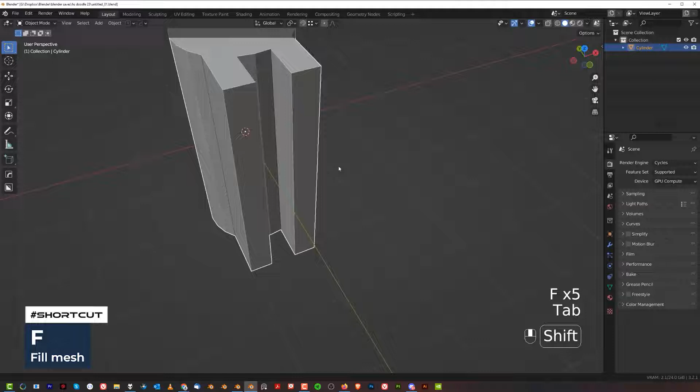And remove faces. Then I'm going to simply select these two and press F to build back the faces. So select these 2 faces, go to top view, and I'm going to press G and move it in here.

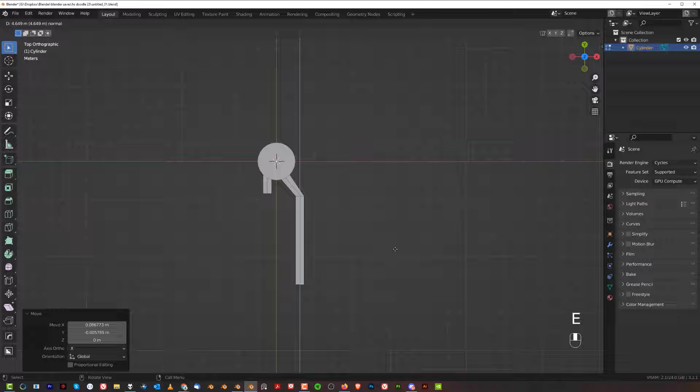Press G and move it somewhere here. And then we're going to E to extrude that like that, and move it somewhere here, and then press Ctrl plus on the numpad and kind of move it somewhere here.

I'm going to grab this ring here, so click, alt click. That didn't work, let me just select everything with Control. There we go. Go to orthographic top view, and I'm going to scale it Shift Z to make sure it's going to scale only on the X and Y axis, and do something like that.

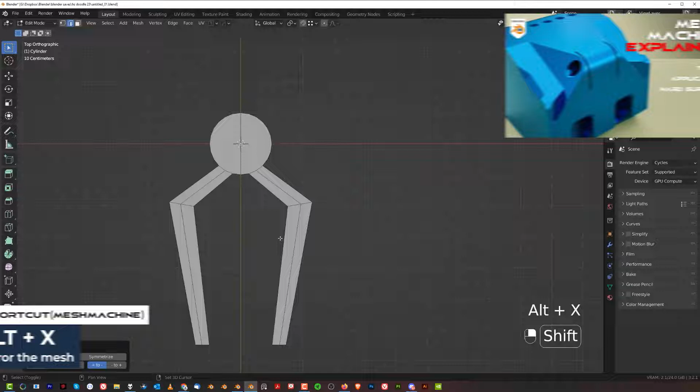Alt X with Mesh Machine, which is a paid add-on, but you can also symmetrize it with Blender. So you could go here in edit mode to mesh and symmetrize, or you could go to Alt X with hard ops and press D, symmetry, and symmetrize it this way, okay?

Now I'm thinking that this maybe is a little bit too close to the middle here. So you know what we're gonna do? We're going to select these faces here and remove them. So remove faces, and I'm going to remove this one as well, and I'm going to actually connect them here, shifting it by 1 face, okay?

Then select them both here and just simply press F to rebuild that shape, and then we're going to rebuild it here, F, and 1 more face here, and 1 more time mirror to the other side. So we got a bit more room here to move in the middle, okay?

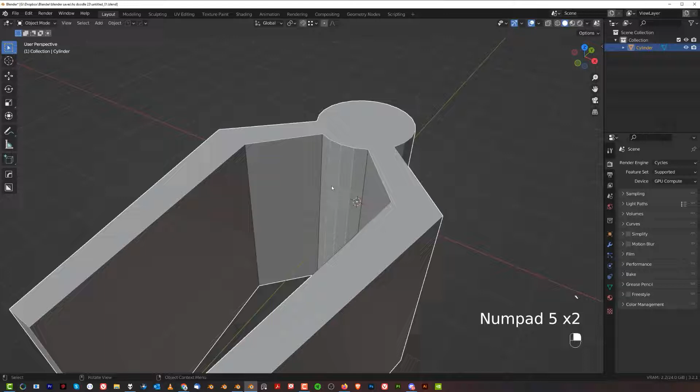So now what we're going to do is create a bit of a bevel here. We're going to remove this one, dissolve, select that, Control B, and make sure you maintain more or less the size of these faces. Alt X to the other side, same thing here, and chamfer with Control B, and there you go.

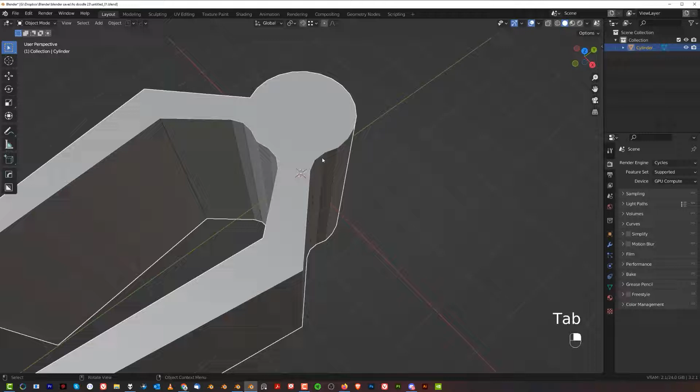Now we don't need that junk in here, so you could either remove it with hard ops, or we could simply select these 2 verts and dissolve vertices. Then you're gonna be left with this, J, and combine here, J, okay? Cool, and actually we could combine this one as well, J, alright?

And then Alt X and Alt X, just symmetrize or mirror both ways, and you're good to go. Now here we got a bit of a problem, so we're going to align this one with this. Select these, shift select that, go to top view orthographic, Alt A, and move to the top. That's also with machine tools, and you're going to flatten this bit in here. This should do.

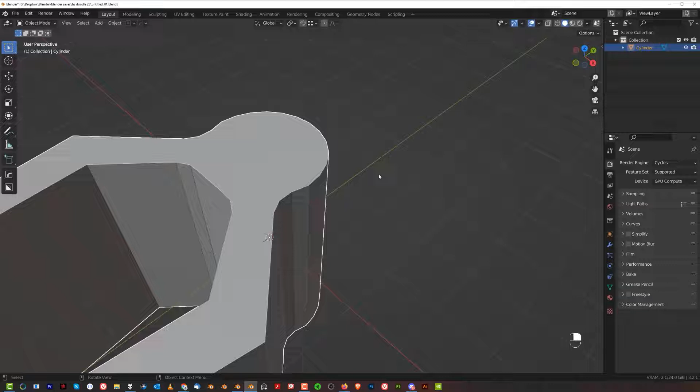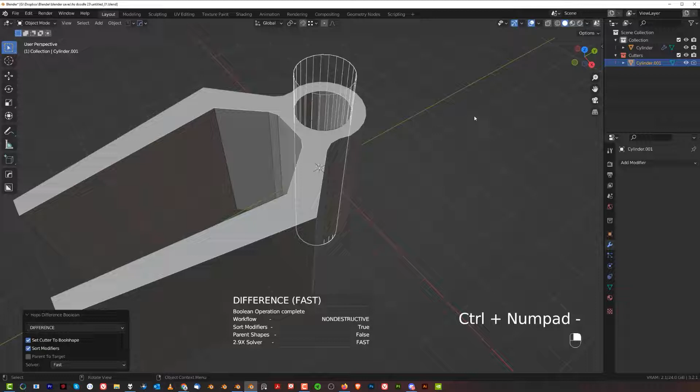Now let's add another cylinder, scale this with SZ, and boolean that with Hard Ops because it's easier. If you don't have Hard Ops, you can just use a vanilla boolean through the modifiers, or enable bool tools through preferences. Click that, select that, and hold Control and press minus on the numpad, which is the same effect.

Now here, what we're going to do is cut this here. You could use a cube, but I'm going to be using Box Cutter because it's faster, and there are links to all the add-ons I'm using in the video description. I'm going to cut it somewhere here like that. Press B, and we're going to add maybe 4 segments, I don't need more than that. We're not going to cut the cutter.

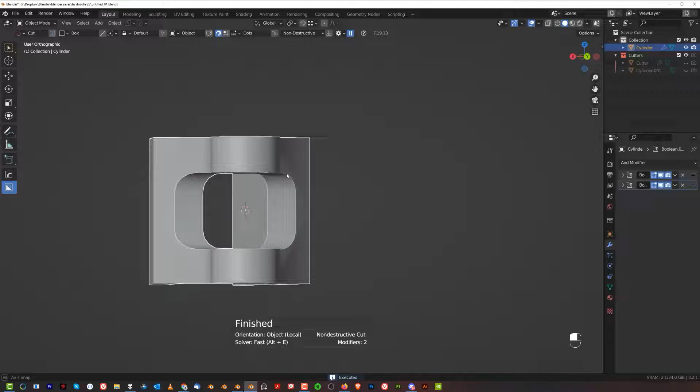We're going to cut actually this shape here, so again 4 segments and cut, and it's going to cut it through, which is pretty cool. Let's move it a bit deeper, so GY and move it a bit deeper somewhere here, and SX to scale it on the X-axis.

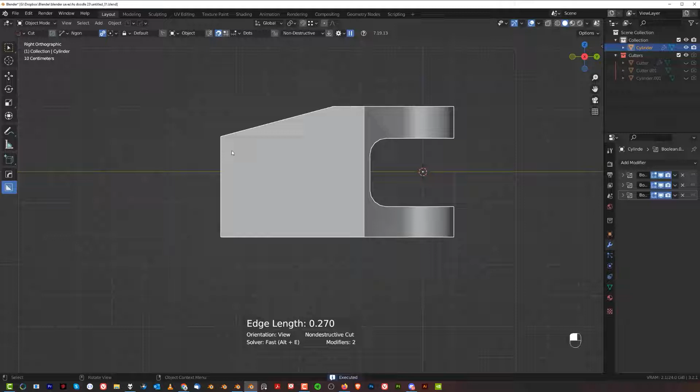There we go, and we're going to cut another one here in this area. I'm going to use Hard Ops to create a cut here, maybe here like this. And then I'm going to create a cut in the middle here with an Ngon, maybe like this, then press B, create 4 segments in each corner, and cut through.

Now this one in the bottom here could be beveled as well, maybe 4 segments, and I'm going to mirror to the other side. So this would be our basic shape.

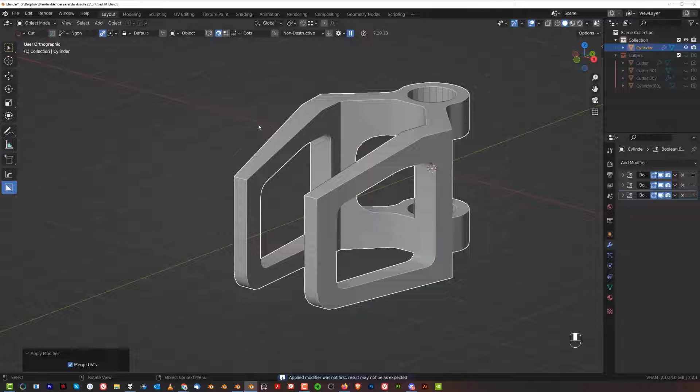In fact, this one here could also be mirrored, so we could go to modifiers with Control Tilde. Let's see which boolean was it - this one, right? So let's apply this. And I'm going to grab that and Control B, also 4 segments, Alt X to the other side, and boom - this is our basic shape.

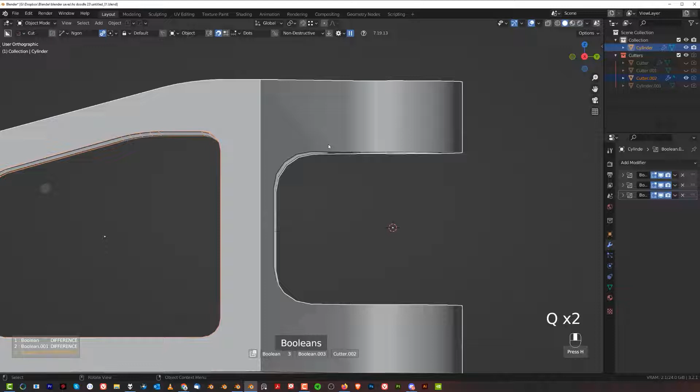We could also bevel this one here just to make it kind of smoother, and the rest is gonna be angular. This is a little bit deep, we can move it a little bit to the right - use ever scroll with Hard Ops and move it somewhere here. You gotta be careful, this is gonna be really tricky, this kind of bevel transition here, but we can work with that. So this would be our basic shape.

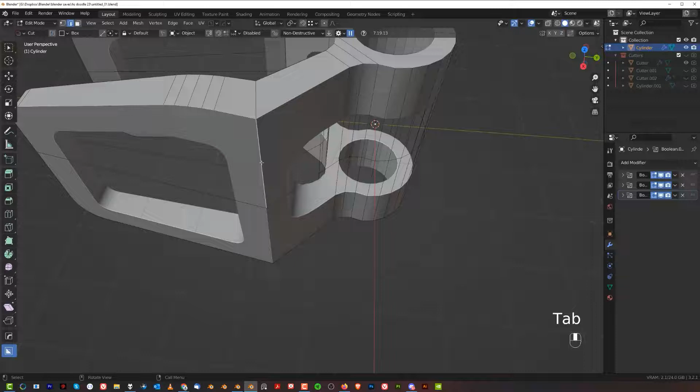Okay, cool, now let's think - we could also slightly curve these, like that, right? So we could curve these. Let's select this one as well, it's going to be less work for us, and do something like this, and then Alt X, and it's going to be a little bit more curvy.

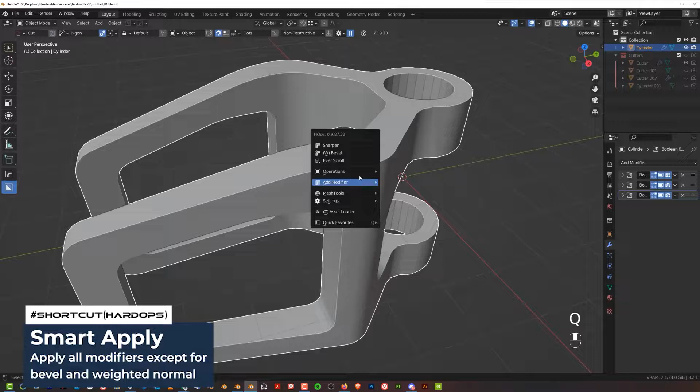Now technically you don't really need sub-D for this, but we're going to convert it into sub-D, I'll show you how easy that is. So let's just go here and apply all the modifiers, right, let's smart apply. And now we can start cleaning that thing up. So we need to create connections everywhere and make sure that we have quads. So we can start here by pressing J, and another one.

We could - where is it here - another one here, so J. Then we could remove these 2 faces, so remove faces and simply reconnect them with F. That's going to save us a little bit of work. And here we could create, let's say, 2 loops and combine them here and here.

Now situations like this, you can go with triangles because it's a flat face. So you could, for example, do something like this - this is perfectly fine, don't worry about it, there's not a quad here waiting to happen. Alt X and you're done, and then Alt X down. Oh, in fact, can we actually do that? No, we can't, so we need to do it manually everywhere. Okay, cool, so here, the same thing.

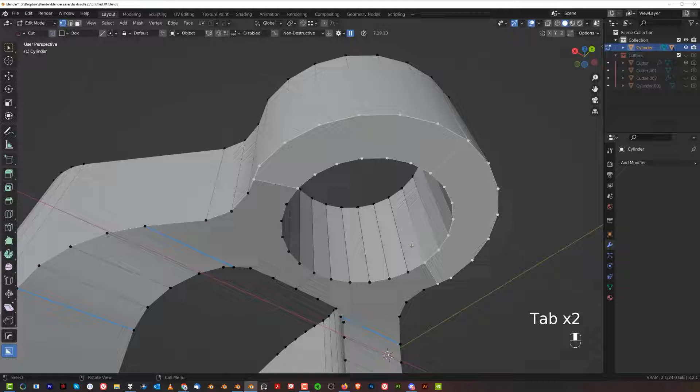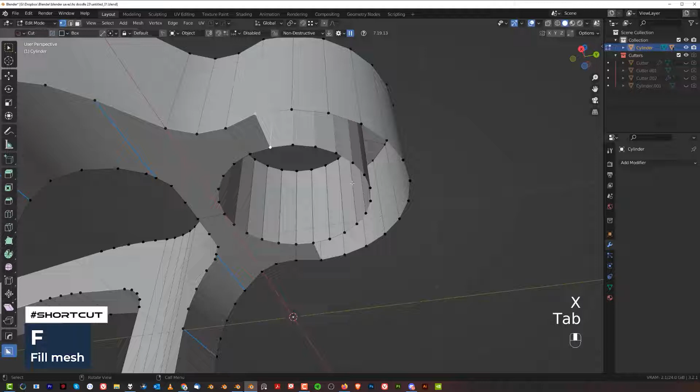We just have to make sure that we have all the connections. So J and J, and we're going to remove these two faces and connect it here. That didn't work very well for us, let me see that. All right, the connection here has to be like this, and move this one here. There we go, now we can remove this face and connect them properly together. Here, same story, we could connect them with J.

You could also be using the HardOps edit tool, which is fantastic for connecting edges. I'll show you in a minute how to use it. Here, connect these two, and you got quads everywhere basically. I'll do the same to the other side.

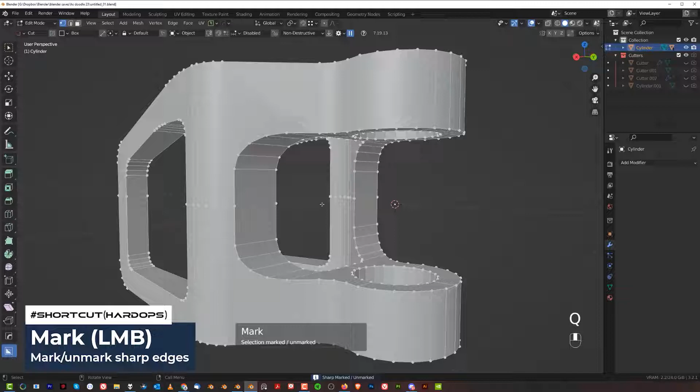I want to remove the hard edges, so what I'm gonna do is select everything and click on mark, which will unmark everything. I don't need any hard edges here. This is not the best connection here, but it's gonna work, don't worry about it. So that's done, and here we need to do the same thing.

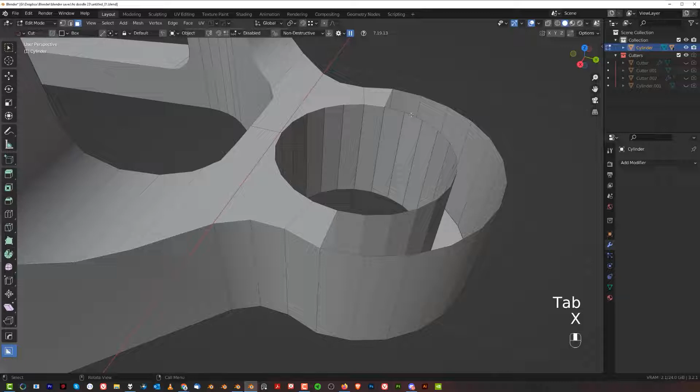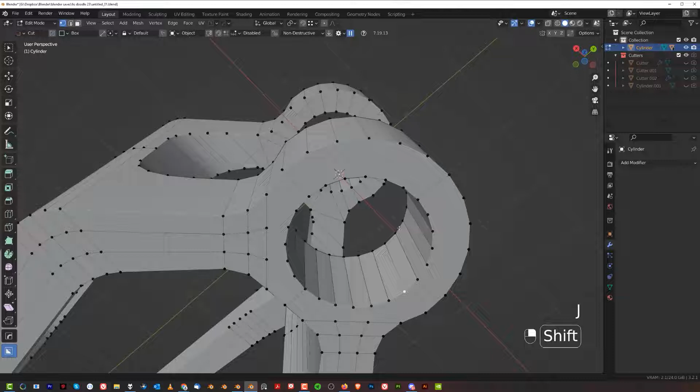So, J, and here J, and select these two and faces, and basically redo that, and connect these two, and connect these two, connect these two, and the same thing here. So connect that and Alt X, and same at the bottom. So connect maybe these two here, and these two, and then remove these faces, rebuild that.

Let me show you this edit tool in HardOps. It's here: Edit multi-tool, press J, and then you can click and drag to connect - click, click and drag, click, click and drag, click. Let me see that. Press space to confirm. This is not the best connection here.

Just remove that, I think it's better to run it this way. And move this one here. So GG, right? Let's just run it here and this way here. Triangle here in the middle is fine, it's a flat face, it doesn't matter, okay?

Cool, here we will need some connecting loops. So let's run maybe one here and split it into, I would say two, maybe it's enough. And connect them here, 1, 2. And then we could drop them down a little bit, although it doesn't matter.

If you don't have to worry about topology on flat faces, don't waste your time on it. There's no point of creating beautiful uniform quads if you're not going to be using them. The most important thing is for that to hold shading. But if you had, for example, curved surfaces, then even quads are kind of important - the even size of quads, because the shading is gonna be a bit more uniform. Here, two of these edges, connect them here, and simply mirror to the other side, and that's the front kind of done.

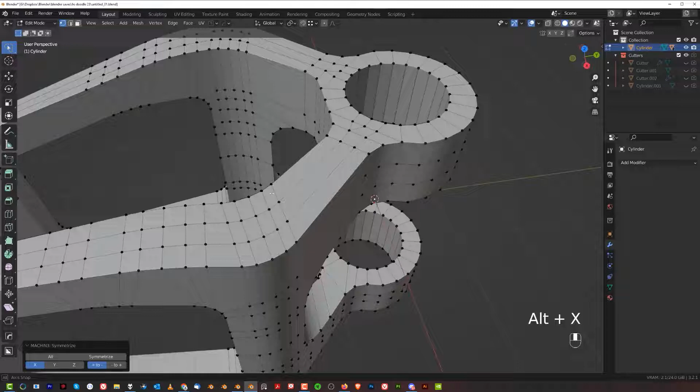And there's going to be another angle here, so we can run a loop here to mitigate that, and run an edge here and just Alt X to the other side. These two, they could be merged together like this. This one should technically go up, but I think it's gonna work, so we can try that. Cool, so I think we connected here. But we still have this problem here on this side, so let's just finish connecting edges.

So J, and then J, and J, J, and J, and the same here. So J, J, J, and J, right? Cool. Same in the bottom.

See how sub-D is slow? That's what I'm talking about. If you don't need to use sub-D, just skip it, because it's just retarded. I mean, use it when you really need it, okay? People just keep saying that you need topology and all that. They're full of shit, you know? You need topology when you really need it. When you don't need it, don't fucking use it, because you gotta be retarded to use it. Lose your time on bullshit that's unnecessary.

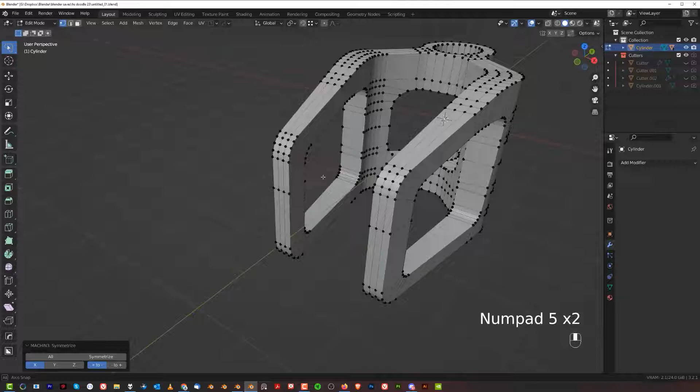So now, possibly I could run a loop here. There we go. So this loop, where is it going? He's going here. That's not what I want. Let me just turn it off here and run it through the bottom here, like this, alright?

There's a triangle here in the bottom, and we need to fix that. So let's run a cut here, and combine this here. Dissolve that, and move it slightly here. And see on this side, yeah, we're gonna get this. So what we're gonna do here is we're going to run a cut like that and remove this.

And there's gonna be an n-gon here. So we could technically run a loop and do this, and you would have a triangle here, but what you could do is combine it like that, and maybe run a loop here through this shape.

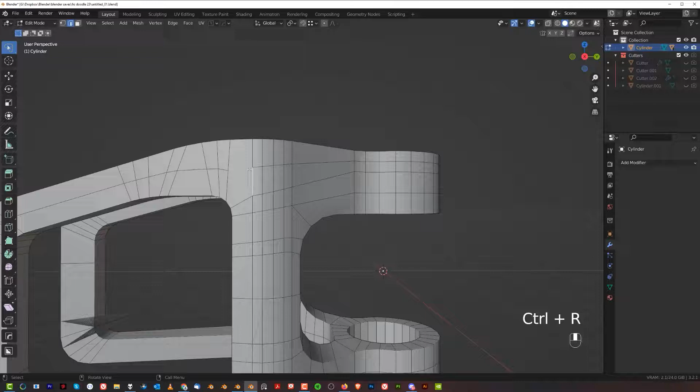So here, and then combine these in the middle. Delete that, and here through the top as well, and then combine these two. Okay, and problem solved, right? Alt X. And now here, this needs to be sorted because we got this problem here in the top.

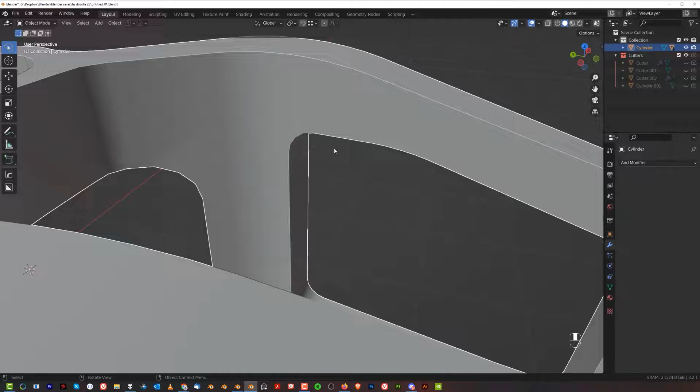This massive angle needs to be solved. So let's just add this another angle here. So let's just fix that by slicing them into smaller portions like that. And then what I can do is I can split that edge into two, or even three. And what I can do is end this shape here in a triangle, because it's a flat face, so I don't have to worry about shading. See what I mean? Then Alt X to the other side.

Now what I'm going to do is select everything. I'm going to resharpen it, which means I'm going to have sharp edges everywhere. Click on one sharp edge, press Y with Mesh Machine select and S select. This will select all the sharp edges that are connected. Then we need to select these that are not connected. So here, right, these, right.

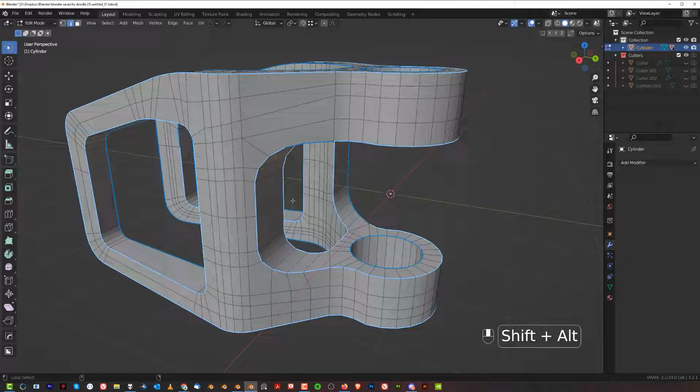And what we're going to do is run bevels on it, just to create security loops around these shapes. Okay, so here, here, and here. Cool. And this one too, right? This one in the middle.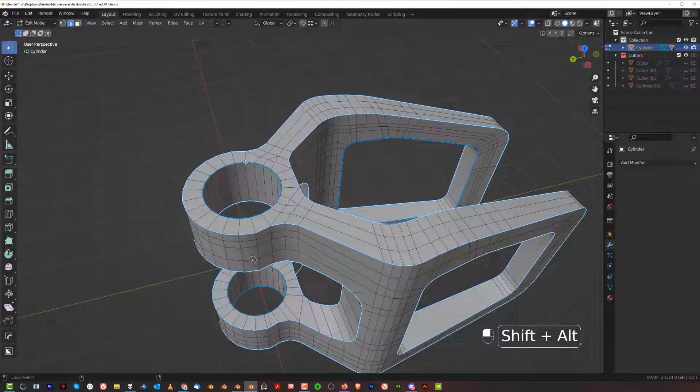So this one needs to be selected too. Cool. So now what we're gonna do is we're gonna press Control on this one as well, right? And this one. And everything. Cool. So now Control B, right?

And you want to press P to adjust the profile. And once you flex it to 90 degrees, press A to adjust the size of it, okay? And then click, and you can turn off the loop slide, which will prevent some of the disasters happening here when the loops are being pulled, okay?

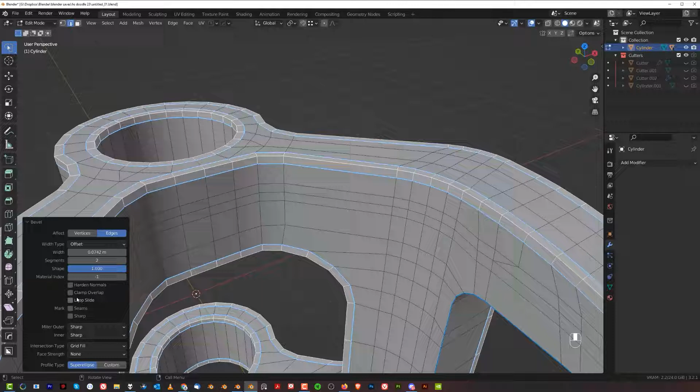And this is your security loop around the bevel. Here too, Control B, let's just do that. And let's remove all the sharp edges because we don't need them. So select all, Q, unmark, and then Control 3, and let's see what we're getting. This is a sub-D already running around.

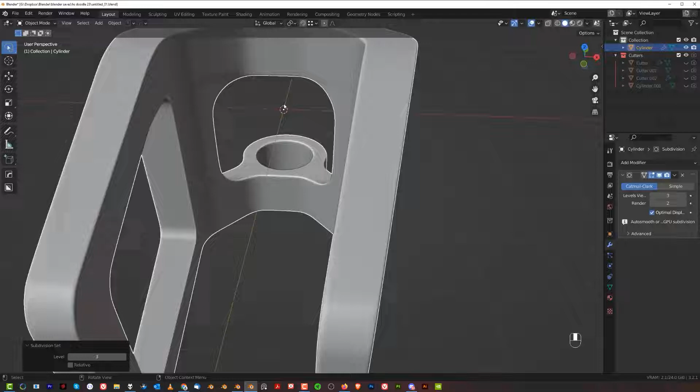There's some shading problem here. Let's check it. So let's go to subdivision, turn it off in edit mode. The reason why I get shading problem here is this area. We need to relieve the pressure here a little bit. So let's run something like this. And this should actually help.

The same here, we could have another loop running around just to make these shapes a bit smaller. Combine them here and combine them here. And this should help tremendously. There you go. Still some kind of dent in here.

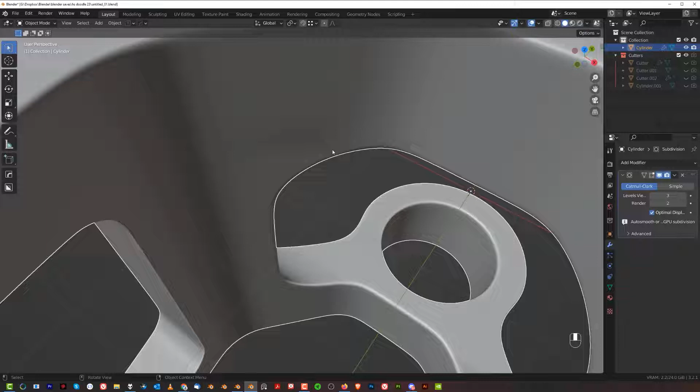Let's just Alt X to the other side to mirror this. There's still some kind of this pole here causing the problem. Seriously, the flow technically should be going with the curvature, which means it should be going vertically, not horizontally. This goes horizontally, right? So we could redirect curvature here like this, create a triangle, remove that, create another loop here, and combine these two.

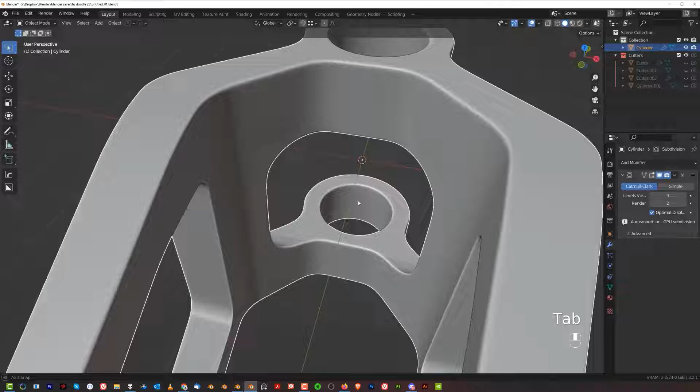And maybe create another loop here. Whoa, okay then. Create another loop. Let me see, this triangle would actually work now. Works fine. There's still kind of a dent here, and that's caused by this pole here in the middle, okay? So here we could...

Let me think, this triangle should be moved to this area, okay? So, GG and move it up, GG and move it up, and there's a massive pole right now. So what we can do is run another edge here like this, okay? We can relieve this pressure here from this area, and this should be much better, okay? So GG and drop it down, GZ and... oh, this is not combined, there we go.

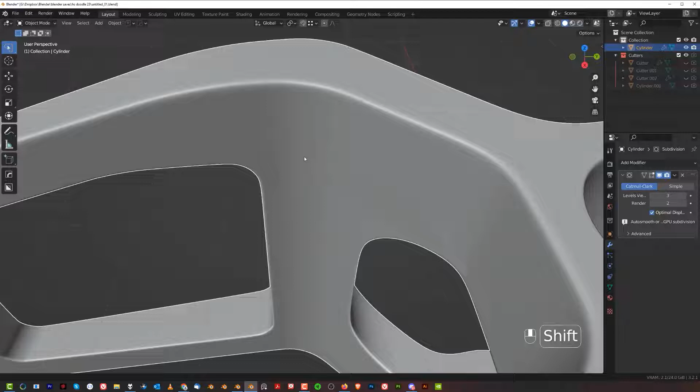GZ and drop it down, and then you don't want triangles on curved areas, on curvatures, but this is going to be flat, so it's okay. So this kind of works, this kind of works now, okay? So you see, triangles are fine as long as you run them on areas that do not bend or have any flex on them. Flat areas can handle n-gons, triangles, anything you desire.

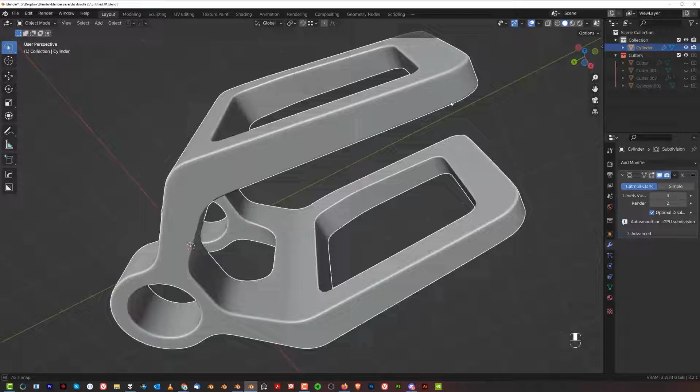And there you go, guys. It's a very simple sub-D shape. It looks really clean, no problems. Topology is good. It's not super equal, but it doesn't really matter. You can see clearly that it doesn't matter. As long as you can get away with shading, this is all you need to worry about, okay?

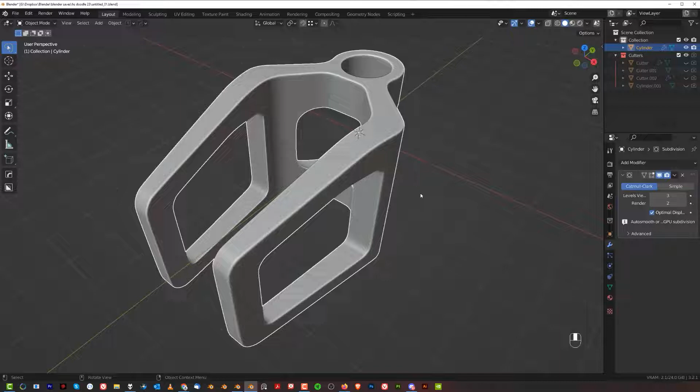So if you're not going to be bending this, and you're not going to be bending this because that's a stiff piece, it's a solid piece made of metal. So no one's going to be bending that, which means it will not be animated. So these quads will not work for animation, they're going to be static. So it's a static mesh, which means if you need sub-D, you just need to make sure the shading holds and the quality of the sub-D itself.

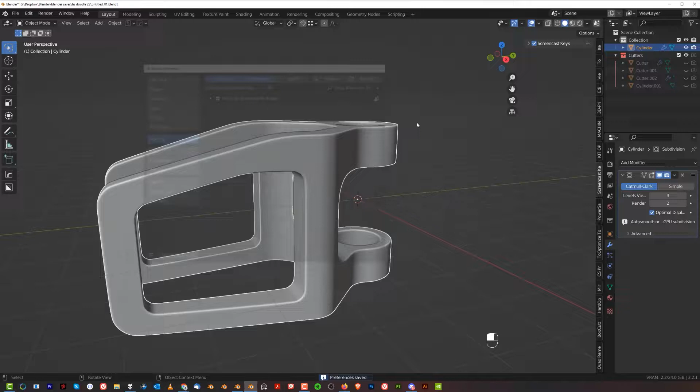The quads here do not have to be equal. Now, if you really want to make something perfect, you can go the easy route and go to Quad Remesher. I don't even know if mine's installed at the moment. It isn't, but I can install it very quickly and I'll show you. Now, Quad Remesher, it's not cheap, it's about $100 or $110. But if you're working with sub-D, especially with sculptures, it's superb, and it will save you a shit ton of time if you need to retopologize something very quickly, because Blender's native retopology tools are garbage.

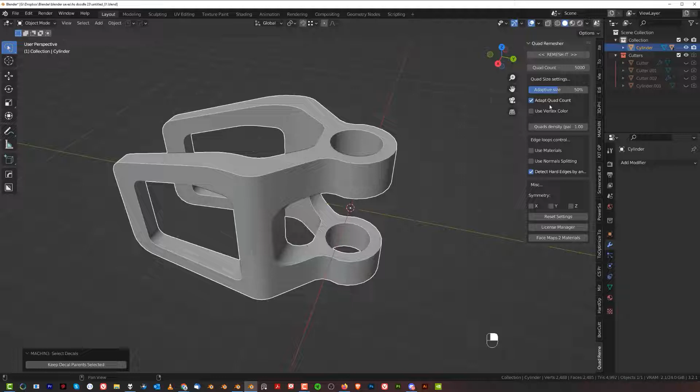So here, let's say that we want to retopologize the basic shape, right? How many faces here? 5,000, okay, so let's go with 5,000. Let's keep the adapt quad size and count, and remesh it. And let's see what we're gonna get. And we're gonna get a perfectly remeshed mesh. And we're going to press Ctrl 3 to sub-D that, and boom, there's your mesh.

See what I mean? That's why you want to use add-ons. Look at this mesh. Now, if someone is bitching at you that your mesh is not perfectly subdivided, well, do that, and you're good to go.

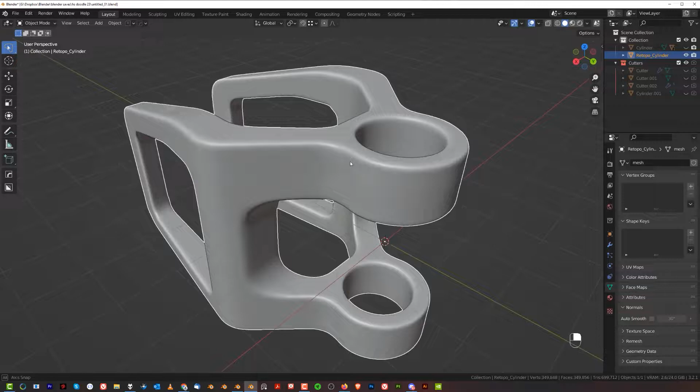Now, just a quick postscriptum, guys. If you have this kind of a nasty edge running all over your sub-D and you don't know what it is, this is most likely auto smooth, which needs to be turned off when you're working with sub-D. So turn it off and it's gonna go away. I had the auto smooth kicking in because I was using Hard Ops, and Hard Ops is basically applying that all over your mesh automatically with the smoothing. So turn it off and you're good to go.